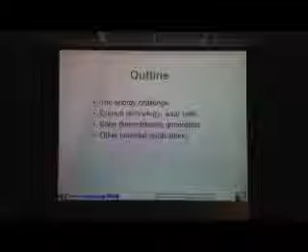So today I would like to share with you the research we're doing in solar energy conversion into electricity. I call it the third way. I hope I'll be able to do justice to explain why it's called the third way. But my plan is to actually start with a bigger picture. What are the challenges that we're facing, and then give a review of the current way of converting solar energy into electricity. Then I'll explain the solar thermoelectric generators and also touch upon some other potentials of the thermoelectric energy conversion technology.

So let me start with the challenge we're facing. Right now, we have a population of about 6.5, 6.6 billion in the world. And you can see that the projection is by 2050, the population will grow to 8.9 billion. Keep in mind, this is about the size of China and India combined. So we have a huge population growth in the future, and we need to feed this population with food and energy. And if we look at the energy consumption per capita, here is the income in constant dollars, and China is here, India is here, and the US is here. That's the energy consumption per year.

So clearly, as people improve their income and livelihood, their demand for energy increases. And that's why even with this 2 billion population increase, the energy demand will be even much higher downstream. And the projection is right now we're at about 14 terawatts of annual energy consumption, and by 2050 we need about 25 to 30 terawatts. And 1 terawatt is 12 zeros of 1 watt, so 10 to the 12th power. And if you calculate, essentially almost every day, if we build one power plant that is typically about 1 gigawatt continuously over the next 38 years, we are at about 12 terawatts. So that's the challenge. The energy demand is very high, and how can we do this economically and sustainably?

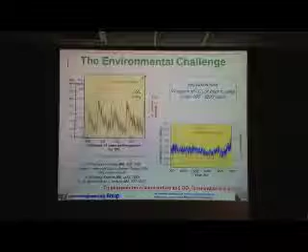Here you can see this is the CO2 content, and here 2000, and over the last 100 years, the CO2 content is definitely associated with our human activities and the fossil fuels. So those environmental challenges, population challenges, and really at the end it is how we can address the energy demand economically, and also without damaging the environment. So this is where the solar energy eventually will play a very important role.

If you look at the solar energy incoming to the Earth, on the Earth's surface we get about 1,000 watts per meter square. And if you multiply by the cross-section area of the Earth, that will get you about 10 to the 5th terawatt. And we said before, in 2050 the energy demand is about 25 to 30 terawatt. So if we can convert a small fraction of the solar energy into electricity and other forms of energy, we will be able to meet our future energy demand.

But of course, here the challenge is the cost, because the fossil fuels are very cheap. For example, electricity generation by coal is about 5 cents per kilowatt hour. So how we can develop the energy conversion technology from solar energy into electricity at a low cost is crucial for the usage of the solar energy.

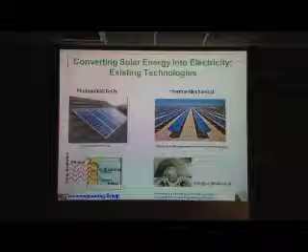And what this device does is a photon comes in, that's the light, the quanta of light, and it excites the electron from a lower level to a higher level. And then you extract the electron out by the electrode. So it's solid state, and the advantage is that you can put it on rooftops as well as in large-scale solar farms. The other is solar thermomechanical.

This is essentially using the sun as the heat to generate steam, and using the steam to drive the steam turbine. And with that, we come to the mechanical domain of converting heat into electricity. And this is what's currently done in all fossil fuel plants, using the thermomechanical engines.

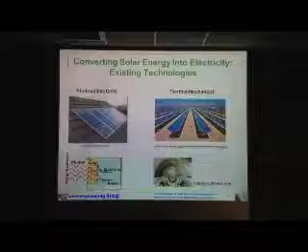And of course, the challenge with the thermomechanical is that it's only very efficient when you do large scale. So solar thermomechanical is only used in the power plant form, in a big area. You collect a lot of the sunlight, generate steam and power the plant. And for both of those technologies, of course, efficiency is very important, and cost is very important.

So I want to spend a few slides to explain why it is hard to get to high efficiency. This is a chart showing the efficiency of different technologies. The thermal power plant, that's a fossil plant, a typical one burning coal is about 40 to 42, 43%. If you burn natural gas and drive a steam turbine, the highest it can reach is about 60%. And the automobile we drive is only about 20% efficiency. So we're throwing away a lot of energy as heat.

And a typical silicon-based solar cell is in the 15 to 20% range. Later on I'll show there are some other cells that have a higher efficiency, 40%, but they are very expensive. So for all energy conversion from heat to electricity, here we plot the temperature, and there's an upper limit called the Carnot efficiency. This is the maximum you can get with any heat engine, and that is also the basic second law of thermodynamics.

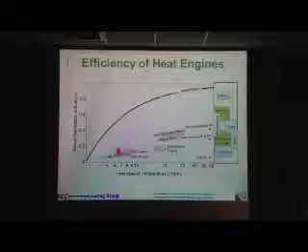And of course, we have other energy forms that don't involve heat, like hydro plants and wind. These do not involve heat, so they're not subject to the second law there.

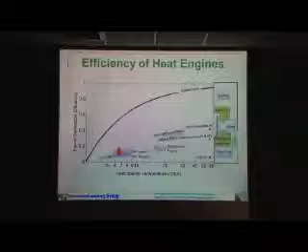And I want to go here a little bit into the limit of the energy conversion and why there's this upper limit, right? So any of those heat engines, so this is a generic heat engine. So basically, we take heat in, and we want to get work, in this case electricity, out.

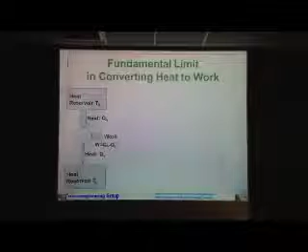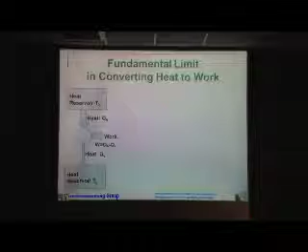But the problem is you cannot convert all the heat into work. Say work is superior, heat is inferior to work. And we have to reject some of this heat to the lower temperature. And of course, the first law of thermodynamics tells the energy balance: what's the heat in, what's the heat going out, and the difference is the amount of work or the electricity you can extract. But why do you have to reject the heat?

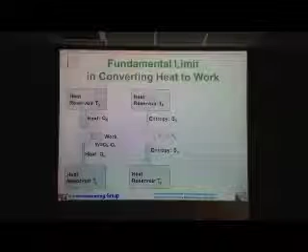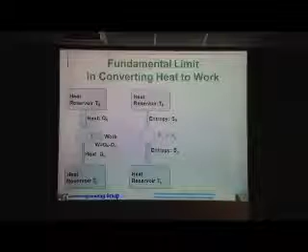Heat is usually considered random. There are random components inside. And work is very ordered, right? That random component, in scientific terminology, we measure by entropy. So this entropy is carried by heat when you take heat from a high temperature source, and the work cannot take it out. So it has to go somewhere. You cannot destroy entropy, say reduce entropy. You only generate it. When you have friction, you generate entropy.

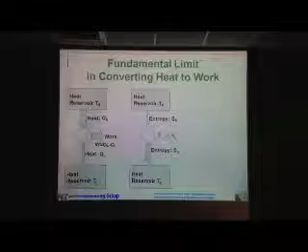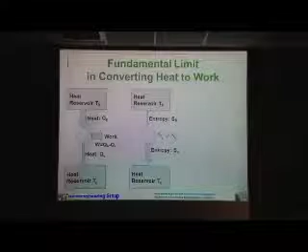And so at the end, you have to use another heat to take it to the lower temperature, reject to the lower temperature. And the best you can do is to have the rejected entropy the same as the incoming entropy. So this is the limit. This is why we have to reject some energy. We cannot convert all the heat into useful work.

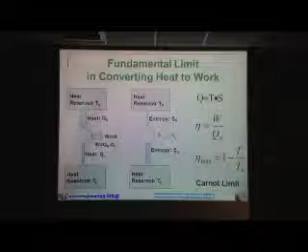And it turns out that this entropy, we typically use the symbol S, is related to temperature, and times temperature, it gives us the heat. So with this, you can actually derive, under the condition that the best you can do is entropy going to the low temperature reservoir. In this case, it could be a river, it could be the ambient air, that's the low temperature reservoir we typically use. And then you burn fire, so the temperature could be 2,000 degrees, and the environment in absolute temperature is about 300 Kelvin. So that gives you the so-called Carnot limit of converting heat into electricity.

But the reality is, if you think about the sun, the temperature of the sun is about 6,000 Kelvin, and ambient is only 300 Kelvin. So we should be getting over 90% efficiency. And if you think about burning fossil fuels, we get about 2,000 Kelvin, and the ambient is only 300 Kelvin. And again, we should be getting 80–90% efficiency. But we are far below that efficiency. And that's because there are always these non-ideal factors.

So if we take the solar cell, the silicon material that people typically use and put on the rooftop, and see where those energies are really lost, right? Silicon is a semiconductor, and the name semiconductor means there is a region where no electrons can exist. That's called the band gap. And this band gap, in scientific terminology, is about 1 electron volt. Different materials have a different band gap, and for silicon, the band gap is about 1.1 electron volt.

And it turns out it's very hard to collect this high energy electron because there are atoms jiggling in the semiconductor. They will collide with this electron, and it quickly releases part of this energy to fall to the edge of what we call the conduction band. And what's left behind is an empty hole, and that also falls to the edge. So that means it generates heat. And this part of the heat in a solar cell is not useful, and we cannot collect it. So in this process, we lose part of the energy.

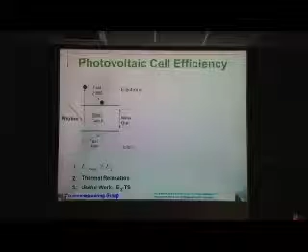And it turns out also, even though there's electrons here, there's also empty state that we call hole here. And the difference, we said, is about 1.1 electron volt. And we cannot take all that out. This is because this electron carries some entropy, and entropy we have to reject. So it turns out the work out is less than this band gap.

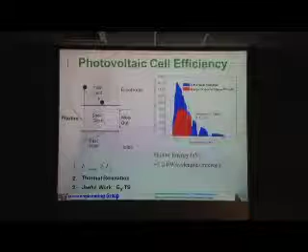So if I put these three items together, you will see why in a typical solar cell you get a certain upper efficiency. So this is the sunlight. And sunlight has a wavelength. Each wavelength has a corresponding energy of the photon, the quanta of light. And here, of course, the sunlight peaks at about 0.5 micron. That's what the eye is sensitive to.

And it turns out that in the case of a silicon solar cell, the energy of those long wavelength photons is below this gap, so they cannot raise the electron from here to here. They do not have enough energy. So when we use a solar cell, we immediately throw out this blue part of the energy, and that is about 25%. And then if the photon energy is here, it's much higher than this band gap energy. So we will lose this part as heat, and this is the rest of the blue.

So about 80% of this is intercepted, and this long wavelength we cannot intercept. So this is 80%. And then the gap is about 1 electron volt, and the average of this energy is about 1.9. So this 0.9 electron volt is again lost as heat. And then this 1 electron volt gap, we cannot take all of it. We only take part of it because of entropy. So we only get about 70%.

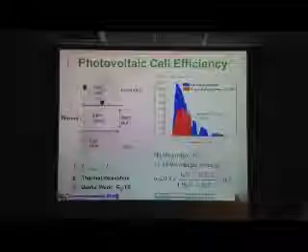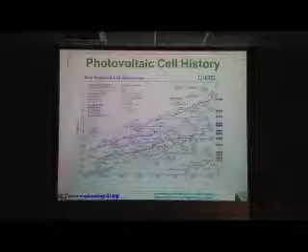So when you multiply all that together, you have around 30%. And this is the best you can do with a solar cell made of silicon or other materials. For a single junction solar cell, that's the limit. And this is a historical map. And it comes to one point I want to emphasize when you do research: the efficiency progression. This is year by year, with all the best people in the world doing research on it, and you can see it's making steady progress.

And I want to point out, if we look at the crystalline silicon cell, this one is the line here, right? And the best now is about 26%. And this is in the lab. When you manufacture them, the best in the deployed world is about 20%. And so silicon is a standard. About 90% of the market is made of silicon cells.

What's also interesting is this cadmium telluride. Cadmium telluride is a thin film. It's cheaper than silicon. And this is the progression of cad telluride. This is an open circle, yellowish. So you can see here, it's about 16, 17%.

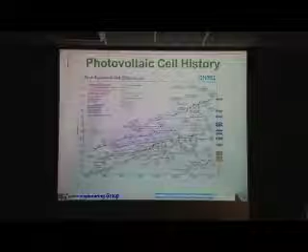And in the U.S., a lot of solar companies had trouble, but one of the two profitable companies is First Solar. First Solar makes the cadmium telluride based solar cell, and their efficiency is actually less than silicon, but they are very profitable because they are cheaper than silicon. So their stock has done reasonably well. I do not look at stocks, I don't know their current situation. But that tells you one thing: the cost is essential.

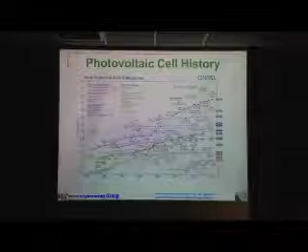And I also want to point out this here, which is beyond the 30% I mentioned, right? This is 42%, the world record. And in fact, it's very impressive because I said the coal-fired power plant is about 42%, right? The problem is this is not a single junction. It's actually stacking several exotic semiconductors together, and they are very expensive. So it's hard to commercialize them economically. And there are people doing concentration to reduce the cell area they use, but so far there has not been a very large successful company based on these multi-junction cells.

So another challenge I want to mention: although I said there is a lot of solar energy, and we only need a little area, the problem is the solar energy is very dilute. It's about 1,000 watts per square meter. Sometimes we use a 100 watt light bulb, so per square meter, the total energy coming in is only about 10 light bulbs.

And so how does that compare to gasoline, right? Gasoline's energy per kilogram is about 45 megajoules. If you do your math, 1 tank of gas is, let's say, 50 kilos and 450 megajoules. And if I compare 1 square meter of solar cell with 15% efficiency, the energy generated in 1 year is only about 2 tanks of gas. That's the energy content.

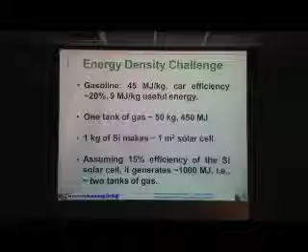So this is the challenge: you have to reduce that cost. Otherwise, it's hard for people to buy into the technology. So cost is really essential.

If you look at the cost, it's rapidly dropping down. This is based on per peak watt, how much 1 watt of installed solar cell costs. Look at 2004 compared to 2010.

2004 is about $8 per watt, and 2010 is about $3.5 per watt. Converted into kilowatt hours, if you assume a 20-year lifetime, typically assumed, the cost of electricity is about 20 cents per kilowatt hour. Compare that to coal-fired power plant generation cost, about 5-6 cents per kilowatt hour.

So that's about a factor of 3 or 4 in cost you want to drop. That's why the U.S. Department of Energy set a very ambitious goal: get to $1, a factor of 3.5 drop in cost. And this isn't just the cell itself, it's the frame, everything included. With that, this technology will be able to compete. Overall, my point is: converting solar energy into electricity, cost is essential.

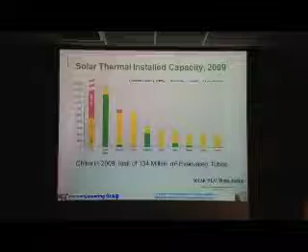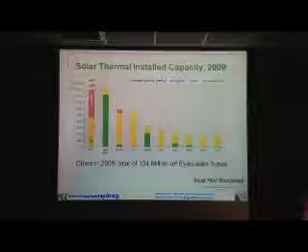In fact, the installed area in China alone is 130 million square meters. If you think about 1 to 2 square meters per family, that's 60 to 100 million households. So it really has changed people's lives.

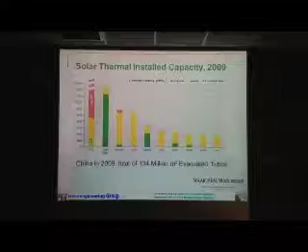This is where I got some inspiration: can we use this and yet generate electricity, because the solar vacuum tube is only for hot water, and it's deployed in many households. My question is, can we generate electricity also cheaply?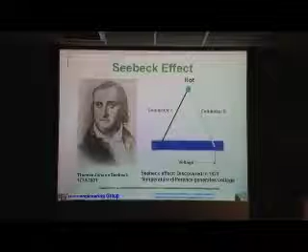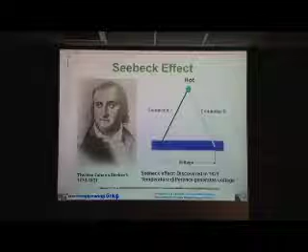That comes to the solid-state thermoelectric effect. The first one is the Seebeck effect: when you have a temperature difference across a conductor or semiconductor, one side hot, the other cold, you can measure a voltage.

This effect was discovered a very long time ago, in 1821, and people used it in labs to measure temperature—they call this a thermocouple. They put the two materials together and measure temperature. So this is only used as a sensor.

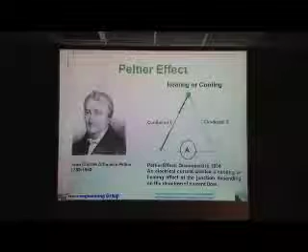And the other is the Peltier effect. So it's named after Seebeck. After Seebeck discovered that effect, and Peltier discovered that if you pass a current through these two materials, actually one side freezes and the other side heats up. He could demonstrate you can make ice out of it, very early on.

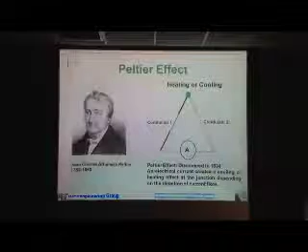So all those effects are called the thermoelectric effect. Nowadays you can spend about $10 to buy a module like this. They're made of semiconductor, P and N type. When you pass a current, one side will cool down and the other will heat up. The reason is because the charges in the semiconductor, the P type and N type, when you pass a current, they go from one side to the other and they actually carry heat.

Normally when we pass current through a material, we see there's resistance, right? We generate heat. But in this case, you actually can create cooling, and hopefully this will work. You see water plus current becomes ice, right?

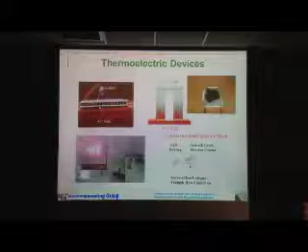So there's no compressor. This is solid state cooling, and when you sandwich this, the device is only about 2 millimeters. It is solid state. So now you can't see it, but here is a piece of copper, here is a piece of aluminum. I put this in between, and you can see it generates power.

So it's a device where when you have a temperature difference, you can generate power, and when you pass a current, you can create cooling. Very versatile, but you don't see it in a household, right? If you go to student dorms, they may have one, because the small refrigerators are sometimes made of those thermoelectric coolers. Or you go to the supermarket and buy a picnic box, sometimes they have a cooler, a thermoelectric cooler.

It turns out the efficiency is not very high, because the material characteristic we call the figure of merit is not high. This figure of merit involves electric conductivity. When we pass a current through the material, we don't want to generate heating - that's Joule heating, that's not good, we don't want to generate Joule heating. So we want very high electrical conductivity.

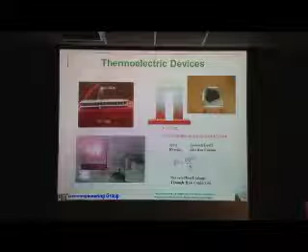And we also want a high so-called Seebeck coefficient - that's when you use a thermocouple, per degree temperature difference, how much voltage you measure. And then in the denominator we have thermal conductivity, and we want that to be low, because if you think about making a refrigerator, this side is cold, this side is hot. In a household refrigerator, you put thick thermal insulation to isolate the ambient from the cold compartment.

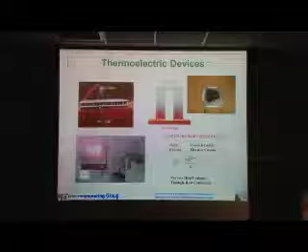In our case, the material itself has to be that thermal insulation. So it has to be a good thermal insulator, a good electric conductor, and we want per degree temperature difference to generate a lot of voltage. That's difficult, and this is where material research has been very difficult. Since 1950 to 1990, there was not much progress. So those devices were invented and commercialized in the 1950s, but they really haven't gotten into large-scale application because material performance isn't quite there.

So now let me turn to solar thermoelectric energy conversion. Basically, now we have the idea: if I can create a temperature difference across the solid state material, I'll be able to generate a temperature voltage and generate power.

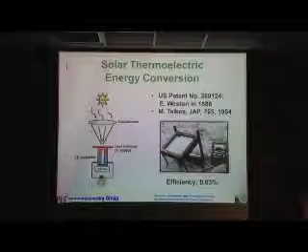If you check the history, this idea was first patented in 1888, and at the time the materials were very poor. In the 1950s, there was an experiment done by Maria Telkes, and she demonstrated you can get about 0.6% efficiency. That was about the same time the solar cell, the photovoltaic cell, was invented. The photovoltaic cell won out, and that field has steadily made progress, while this has stayed at this number since the 1950s - really low progress.

So when we look at this, the first question is how I'm going to create that temperature difference. This is a heat engine, so the larger temperature difference, in theory, the better. I do a very simple calculation.

The heat flow equals this material property we call thermal conductivity, which has a unit of about 1 watt per meter Kelvin. If I want a 100-degree temperature difference, and L is the thickness of that material, so I say, okay, if I have a sun with flux of 1,000 watts per meter square, I need about 100 millimeter. This is immediately related to material cost, because with a lot of material, you won't fly with that. So the key is how I can concentrate the sunlight to get a higher heat flow.

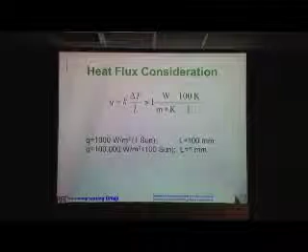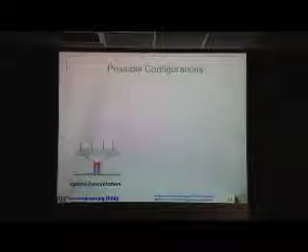Of course, it's easy to say I'm going to use a lens or mirrors or various technologies people have been using for solar thermal power plants. But we know that's not going to be cost competitive, because based on the material property, I cannot build a solar cell as good as a photovoltaic yet. So I cannot do this big tracking structure with the mirrors, and that's not cost effective.

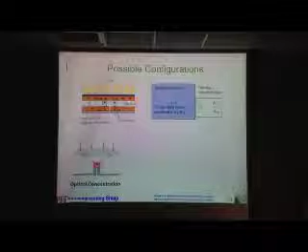So what we took is this vacuum tube idea. What if I put this device in vacuum? I have a surface to receive the sunlight, and since it's in vacuum, the heat received has no place to go. It's forced to go along the copper we use and to the material itself. So now I have a piece of metal, aluminum, copper coated with this absorber, and these are the thermoelectric legs. If I take this area ratio as my concentration, I call that thermal concentration, then I can do a thermal concentration without the optics, and that way I can potentially reduce the cost.

I could also think about some optical concentration, and that's where you have to do your cost balance and combine them together. So those are some details.

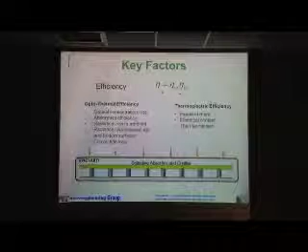It turns out the efficiency is not just due to the materials, but when I raise the temperature of this surface, I also lose heat. So we have to care about the heat loss, even though it's in vacuum. But when the surface is hot, you will radiate out the heat. So that's why we need those surfaces that can minimize that heat loss. This is the same even for solar hot water absorbers and collectors.

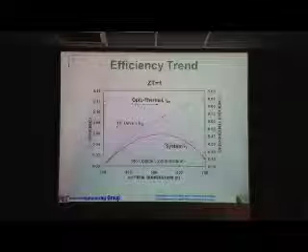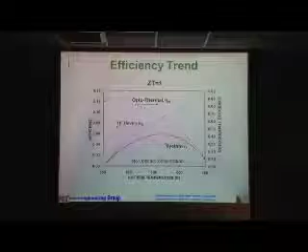So with that, we have some prediction of efficiency, and it's not very high with this current material, but it's very respectable, because when people look at solar, anytime you're about 5-6%, people start to pay attention, because the amorphous silicon solar cell is also just in the 6-7% range. So this is a prototype we built.

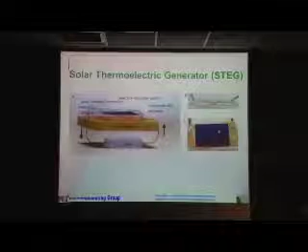We have this absorber, and then we put the two small legs. That's our generator, and then we put it in vacuum. The beauty of this is the solar energy absorbed by this absorber - they are flat, but the heat has to concentrate through this absorber, through the leg, and create a temperature difference.

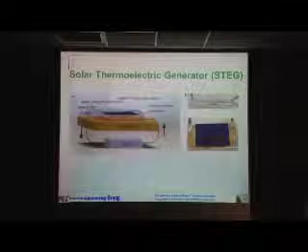So this is the efficiency we measure. Here is no optical concentration at all. This is a 1.5 optical concentration, and that's about 5%. So you immediately bring - because I said in the 1950s this efficiency was about 0.6% - that's a real large step for this technology.

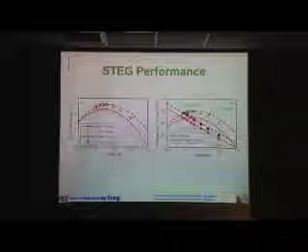And I say this thermal concentration - why is it important? That's because the material we use is a very small amount. So I have a big piece of absorber, but my generator material is very small. And that way we're reducing the cost. Because of material cost, with this, we can reduce the generator cost to 10 to 20 cents per watt. So that's the beauty of using this thermal concentration.

And this is in a vacuum - vacuum is always a concern. But here is the power output. You can say this is typically what people use in hot water vacuum systems. And even at a lower vacuum, we don't lose much performance. So this is the range of performance - you can see it doesn't lose much until you go to a relatively high level of pressure.

And this is another interesting aspect. In solar energy, one of the problems is climate change - you have clouds. So when a cloud comes in, for example, your solar cell immediately has no sunlight going to the surface of the photovoltaic, and you're out of electricity. That turns out to be a big headache. This is the same for wind. That's why a lot of times people actually have to build another power plant just beside those renewable power plants to provide backup leverage.

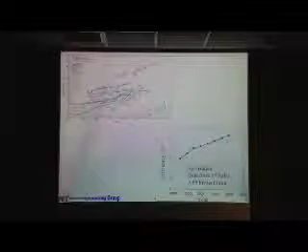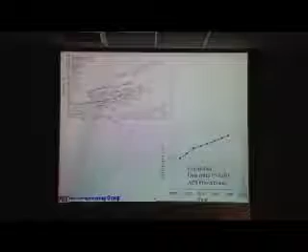And they are very low cost, much lower than silicon, so they made a lot of money. So cost is very important for the success of renewable technology. In fact, after this, we had a spin-off company, GMZ Energy, and it has very good investors: BP, GE, and Kleiner Perkins. Hopefully we'll be able to put this on the market in the next year.

And what's the future, right? We talked about this technology, and of course, we want to make it more efficient. There are different directions, and these are some theoretical calculations. I mentioned ZT before. Here it's about 1; that's our material. So we are doing a lot of material research, trying to improve this figure of merit.

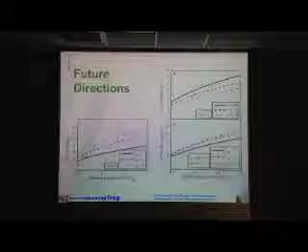And also, we can add some optical concentration. I don't want to add too much because that's related to cost. And I can try to reduce the loss, the emission loss here represented by epsilon. So there are different ways to go. And also, we are looking at what if I go to higher temperature, right?

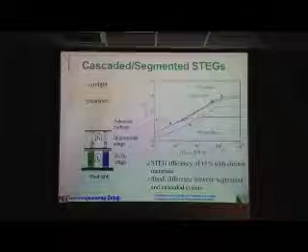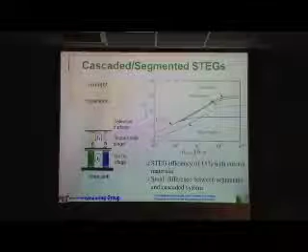This is a simulation of putting two materials together and going to higher temperature, and it says potentially when I combine two materials with optical concentration, at 100 times optical concentration, I should be able to get about 15% efficiency. Of course, this is only a modeling simulation. There is a lot more work we need to do.

And also, when you do this, you have to ask, what's the cost? Can I be eventually competitive? Because as a technology, there are a lot of different approaches, and you have to make them attractive.

Heat is like an acoustic wave. We know that when there is a surface, there could be echoes. If I make a lot of those interfaces, the high frequency heat waves propagating in the material see the interface and echo back. With that, we can improve the material, and we have demonstrated this in a lot of material systems. This is a very big effort in our research.

But I want to say this is actually very gradual. A lot of people are working on improving these materials because, as I said before, from the 1950s to the 1990s, there was not much progress in the materials. Then in the 1990s, people started thinking about nano, how we can use the physics we learned in nanostructures to engineer better materials.

And this is one example of what happens if we go to higher temperature, with a specific material called skutterudites. When we go to 500-600 degrees, we get about 10% efficiency. Of course, these are heat engines; the higher the temperature, the higher the efficiency we'll get.

And let me talk a little bit about the other application, because I said solar heat, right? But in fact, if we think about the importance of heat that we encounter every day, we cook, we have our home furnace, right? If you look at the heat problem from two perspectives, one is looking at the efficiency, utilization perspective. The other is looking at the source perspective.

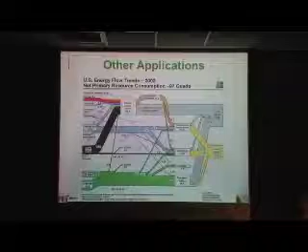And you can see that we're actually losing about 60% of useful energy. We only use 40%. And I said before, Carnot efficiency is typically around 80 to 90%. So we are far away from what we could achieve theoretically. So recovering this heat, if we can recover half of this heat, 60%, we really reduce significantly the energy demand and reduce the environmental impact. So that's one view, one way to look at it.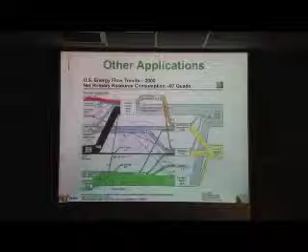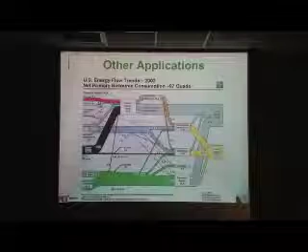And the other is to look at the input side, right? From nuclear to fossil fuel, coal, natural gas. It turns out that we all use it first as heat, generate heat, drive a steam turbine. So over 90% of energy is actually used as heat. So this is where, if we think about the heat, we can use the thermoelectric technology to improve the efficiency of the usage as well as the conversion process.

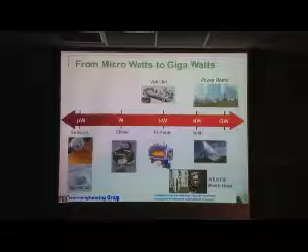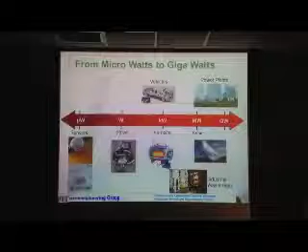So indeed, there are people looking at various possibilities. And I mentioned, of course, solar thermal. And it turns out a big effort now is in automobiles, because automobile efficiency is only about 20%, and we are throwing out the rest of the energy as heat. And of course, industrial processes and home furnaces. And roughly, we use about 1/3 of energy for transportation, 1/3 for buildings, and 1/3 for industrial processes. So everywhere we look, we can see the opportunities.

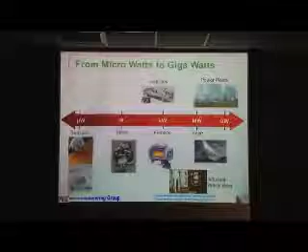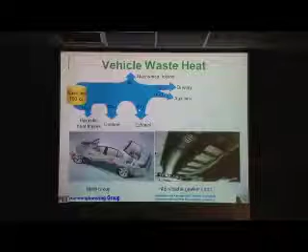And heat, for example, in the automobile, I mentioned it's about 20%. And again, about 1/3 of the heat goes through the exhaust pipe, 1/3 of the energy goes through the radiators. So now a lot of countries have legislation, particularly Europe. It says that by 2018, if you sell a car and your CO2 emission per kilometer driven is 1 gram above the standard, you pay 95 euro fines. So the auto manufacturers are very serious about reducing their CO2 emission. That's policy driven.

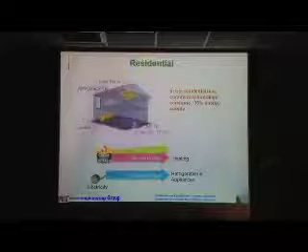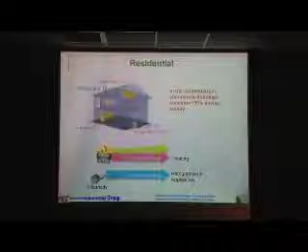But there are many other possibilities. For example, if we look at the household, right? In your basement, you have the furnace, and it burns fuel, gas or oil, and it creates a 2,000 degree temperature hot source. At the end, we only heat up hot water, right? In a power plant, it generates steam and drives a steam turbine. But you can't do that easily in a household. So a solid-state thermoelectric generator could be very useful for those applications.

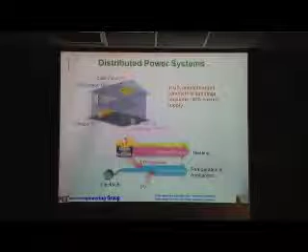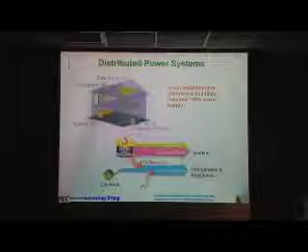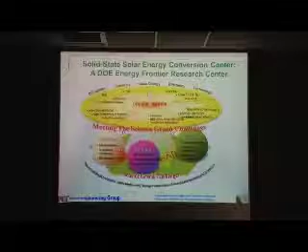So finally, I just want to use one slide to introduce this US Department of Energy Frontier Research Center. This is the Solid-State Solar Thermal Energy Conversion Center that I'm the director of. The US Department of Energy funded 46 Energy Frontier Research Centers. Each of the centers is pursuing a specific topic and focuses on the fundamental understanding of energy conversion, energy storage, and energy transport, all those issues.

And our center looks at how we can tailor the solar energy and use it in the form of heat. So we look at the fundamental science of photons, the sunlight, and convert it into electricity. And then we have to look at the heat aspects, the phonons, the lattice, the atom vibrations. And with that, we are looking to create a really transformative technology in thermoelectrics and also photovoltaics.